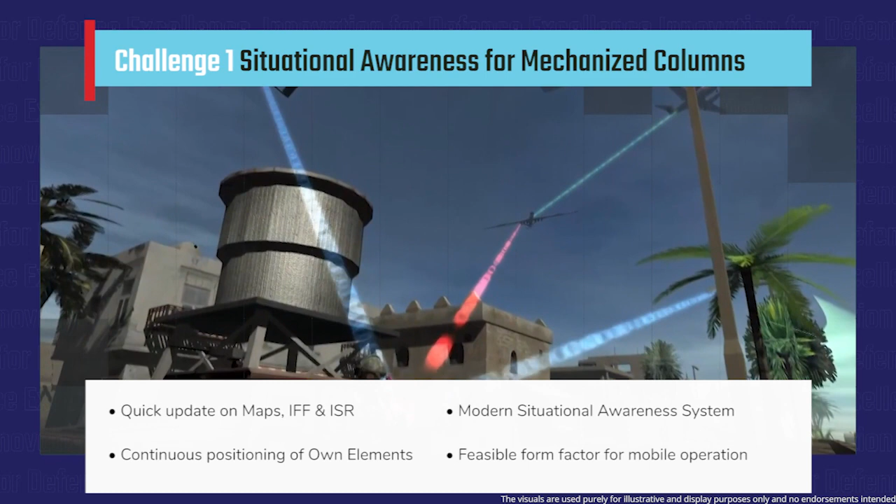Situational awareness for mechanized columns. Information in a battlefield environment is extremely complex and rapidly changing. With the rapid development of data collection, reconnaissance and surveillance devices, it has become very crucial to develop an intelligent and integrated platform to receive the information from various sources and visually present the analysis to commanders in real time for swift and better decision making in the battlefield.

AR/VR based sortie preparation aid. Aircraft and helicopter pilots often practice fly-throughs and sortie missions. During each of those practice flights, the pilots need to follow and familiarize themselves on various on-ground, during takeoff, in-flight and landing procedures. However, with the high cost of actual flying and very limited access to flight simulators, there is a need for cost-effective AR/VR based training solutions for the pilots. The solution should be easier for pilots to operate, portable and ruggedized for military specifications.

AI-based RF spectrum management. The wireless spectrum has been managed and utilized for military communication over many decades through a complex regulatory framework. The current methods of assessing and allocating spectrum are complicated due to the growing level of interdependencies as the number of services that require the band increases exponentially. An advanced and intelligent solution is required to seamlessly manage the spectrum allocation among the services within the military.

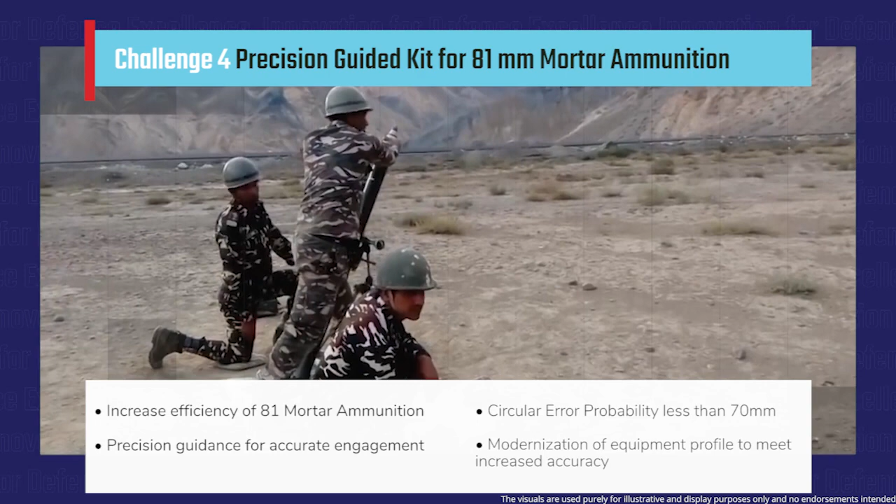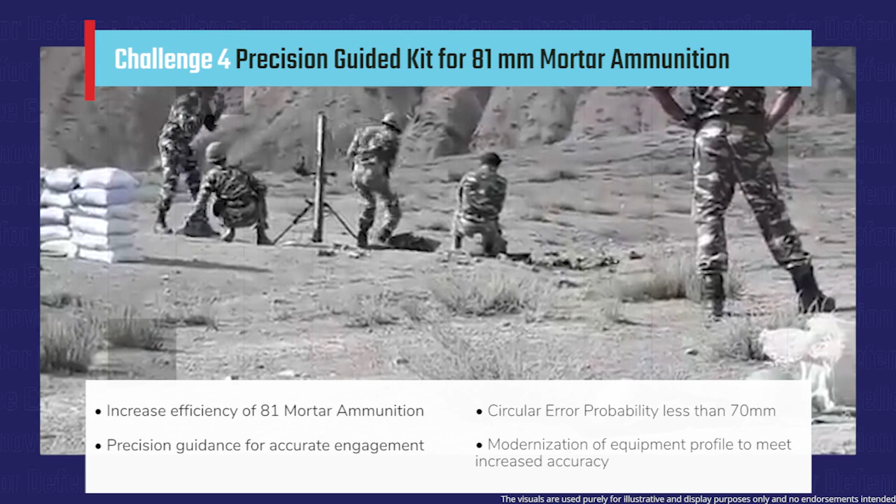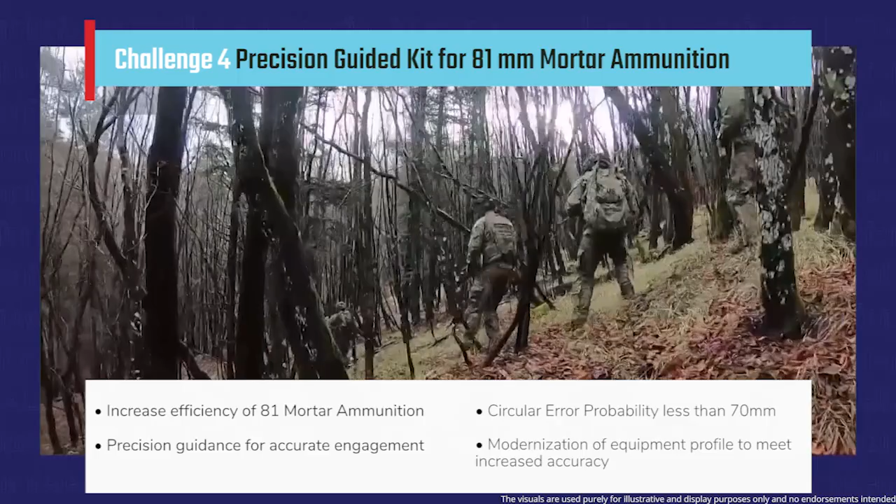Precision guided kit for 81 mm mortar ammunition. Infantry battalions use 81 mm mortar as battalion support weapon to provide close fire support to assaulting infantry. The ammunition of the 81 mm mortar has a tendency to disperse at the object or target end, and there is a very limited guidance or aiming equipment to support precision firing. There is a requirement to develop a solution with precision guidance for accurate engagement and reduced collateral damage.

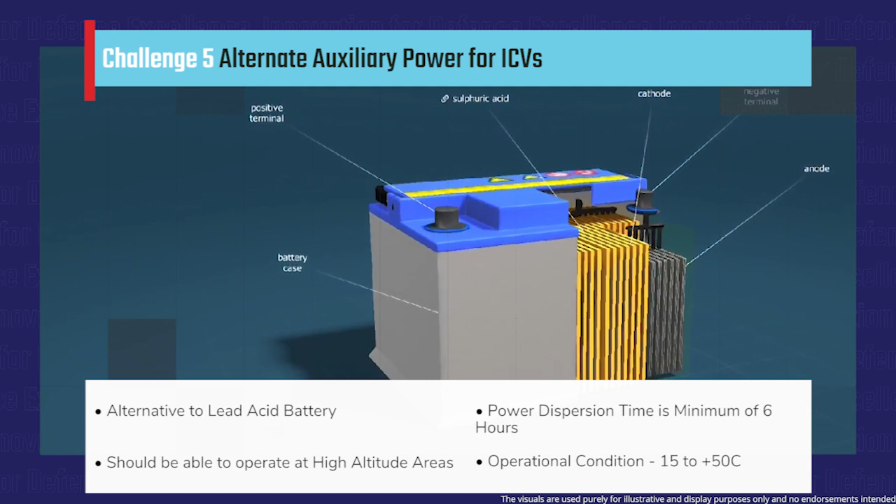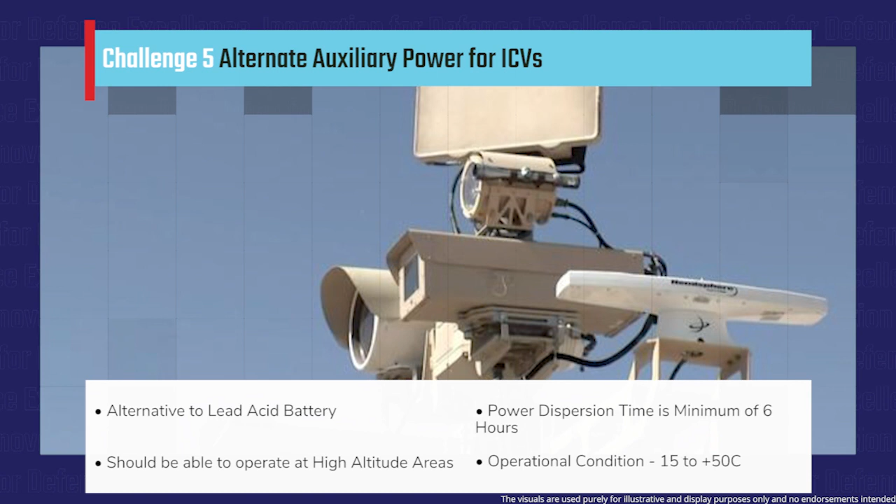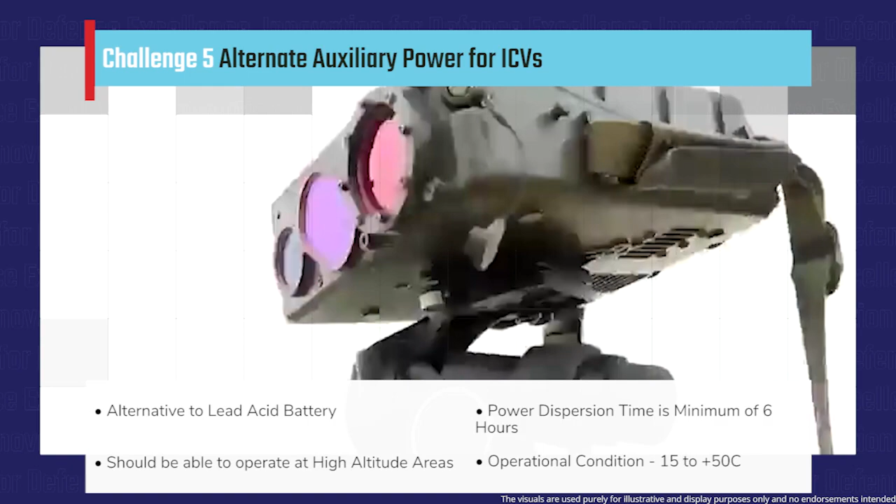Alternate auxiliary power for ICVs. During tactical situations, the infantry combat vehicles are powered off for stealth and utilize the lead-acid batteries to operate the sights, communication equipment, gun traverse and dome lights in order to carry out the silent watch of the battlefield without the main engine. The present lead-acid batteries lose power rapidly and degrade rapidly in extreme climate conditions. There is an immediate need for an alternate source-based auxiliary power enabling extended silent operation of the ICVs.

Part Task Trainer for Mirage 2000 upgrade aircraft. Part task training devices of aircrafts are used to offload some of the training tasks from the full mission simulators. Part task trainers are ideally used for instrument familiarization and other standard flight operations of an aircraft for training purposes. It is proposed to develop a part task trainer for Mirage 2000 upgrade aircraft with an accurate replica of controls in the cockpit.

Wideband HF modem for secure network. RF-based high-frequency communication has become an integral part of modern aircraft's communication systems. There is a need to develop an all-band high-bandwidth digital modem for bidirectional communication of voice, data and video. The modem should be compliant with the military-grade standards with a data rate in excess of 48 kilobits per second.

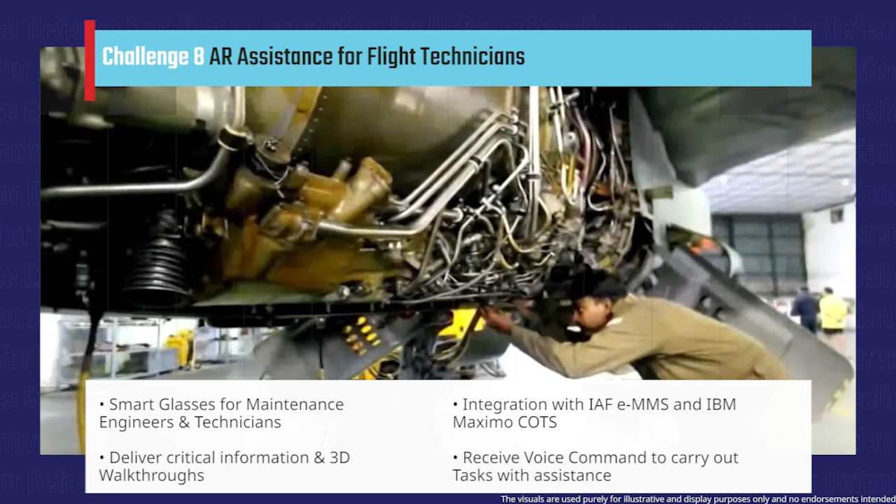AR assistance for flight technicians. Aircraft technicians and maintenance personnel refer to manuals and printed checklists during service and maintenance activities. In order to exponentially increase the quality and to reduce the downtime during maintenance, it is recommended that an AR solution is developed which guides the technicians through relevant diagrams and animations to correctly diagnose and perform the intended maintenance activity.

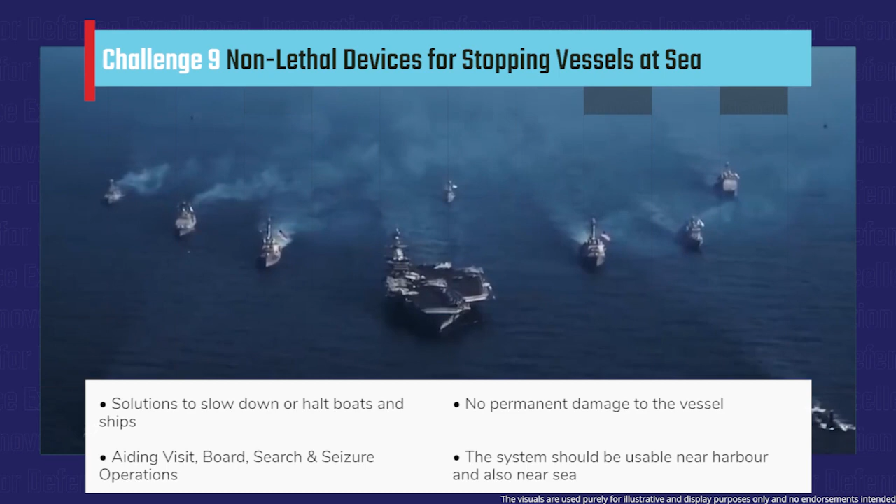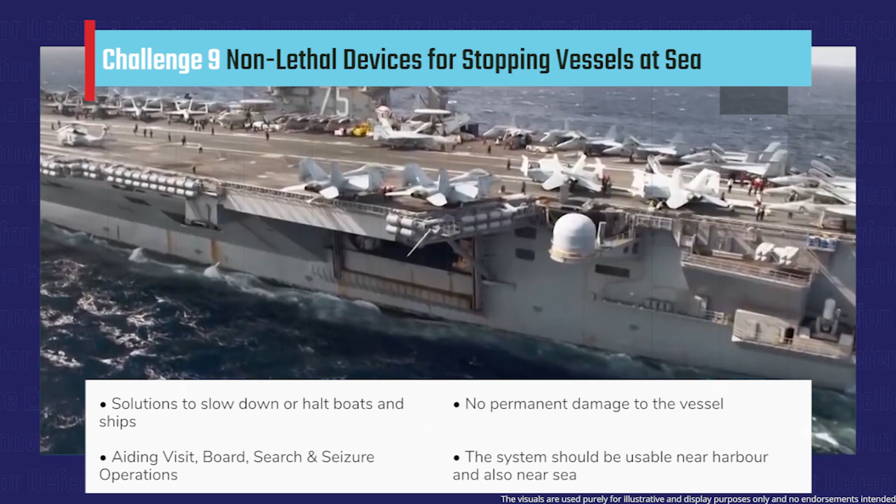Non-lethal devices for stopping vessels at sea. During peacetime, in order to perform visit, board, search and seizure operations on vessels, traditionally a rope with a drogue is launched against the propeller to stop the vessel. Such a system has many shortfalls and is highly inefficient to effectively stop the vessel. A solution is required to stop vessels in sea without causing any permanent damage.

Enhancing underwater domain awareness. With the advancements in the submarines, underwater drones and sensor technology, the Navy continuously monitors for threats underwater in the sea. There is a need to develop a comprehensive underwater domain awareness system which combines data from various maritime sensors and assets and presents in a meaningful manner for information consumption. The solution can also be equipped with advanced AI/ML capabilities to detect submarines and other underwater systems.

Sensor miniaturization for drones. Mini and micro drones have become an extremely efficient and cost-effective option for short and low-altitude surveillance. The conventional sensors, operational aids used on larger aircrafts need to be miniaturized for their use on the mini and micro drones. It is required to develop miniaturized versions of radars, sensors and navigation aids for implementation on drones and swarm systems.

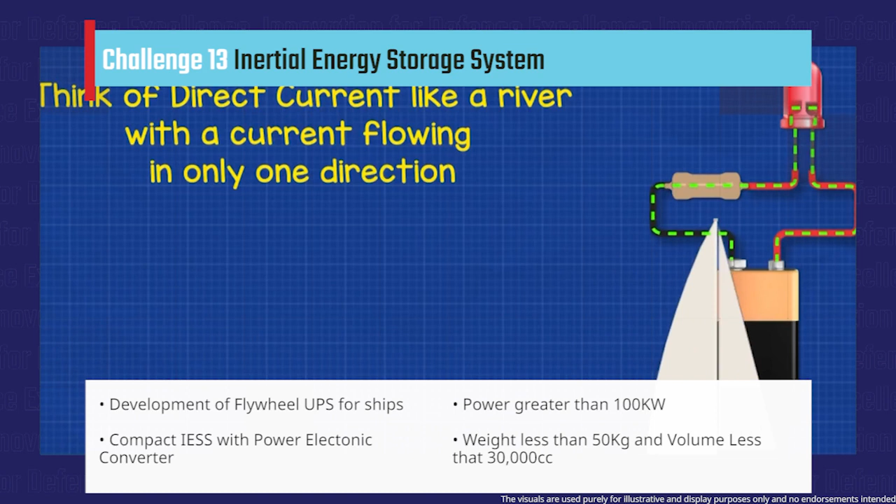Inertial energy storage system. The engines that propel ships in high sea are attached with heavy flywheels to store and regulate rotational energy. The energy stored in the flywheels can be converted into electrical energy for uninterrupted power. It is required to develop a system that harnesses energy from the high inertial flywheels and stores it in the form of electrical energy for uninterrupted power to critical parts of the ship.

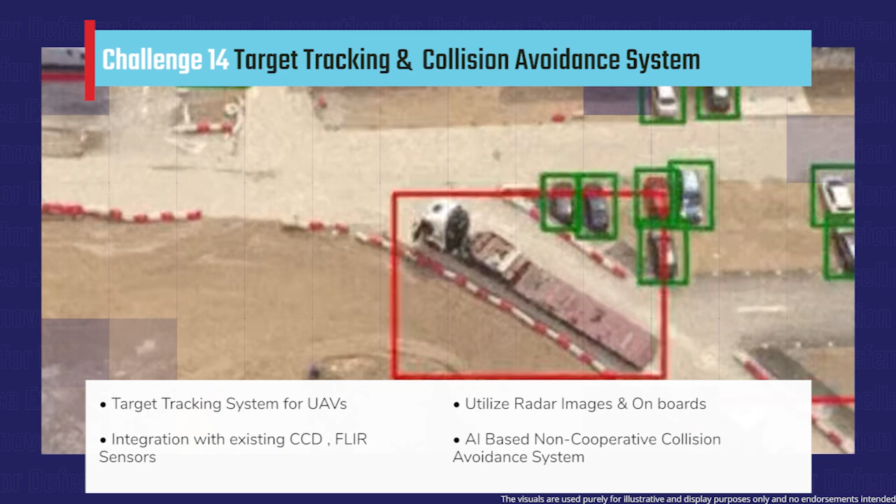Target tracking and collision avoidance system. Drones and unmanned aerial vehicles have become the go-to option for short and quick aerial surveillance and reconnaissance operations. Such UAVs are equipped with cameras and sensors to capture various ground movements in a battlefield or tactical environment. There is a need to develop an advanced AI/ML-based algorithm to identify and track ground targets. Also, an algorithm is required to avoid collision of UAV with objects such as trees, buildings, poles and vehicles.

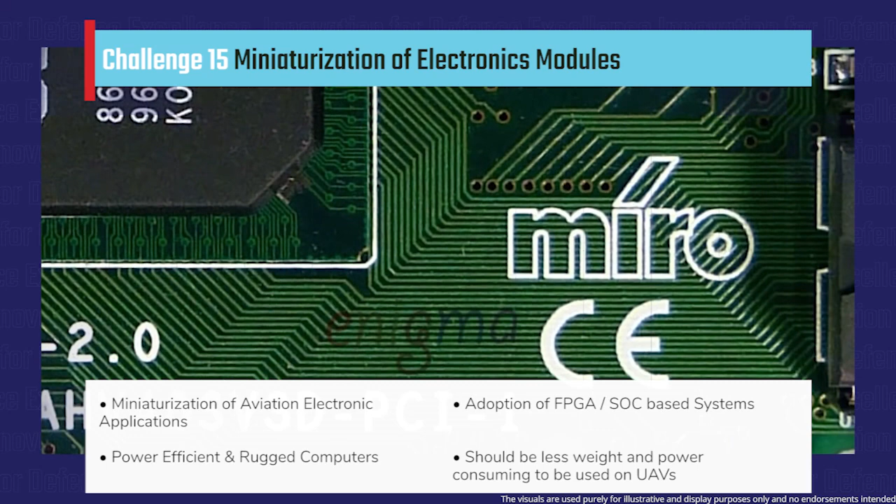Miniaturization of electronic modules. Reduction in size, weight and power of onboard electronics and equipment is of utmost importance in the aviation industry. The processing units and communication electronics used in military aircrafts are outdated and extremely heavy when compared to commercial electronics. It is required to reduce the weight and power consumption of core electronics in aircrafts by using multi-core processors and FPGAs.

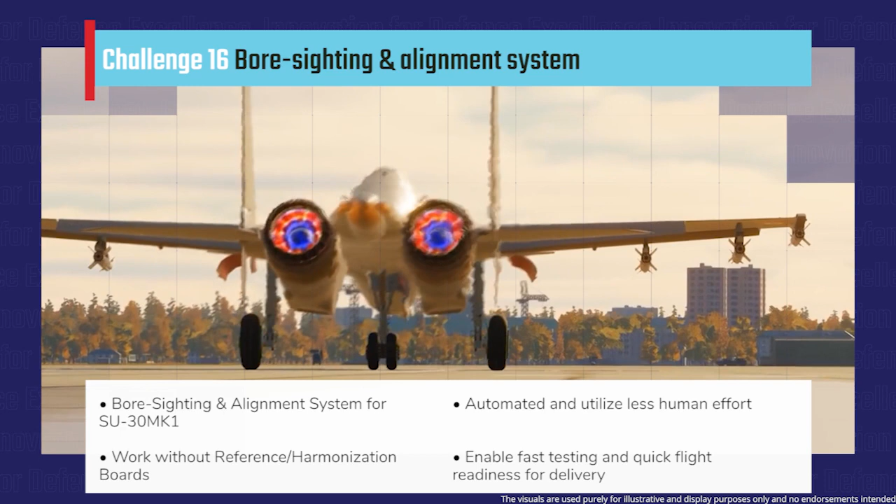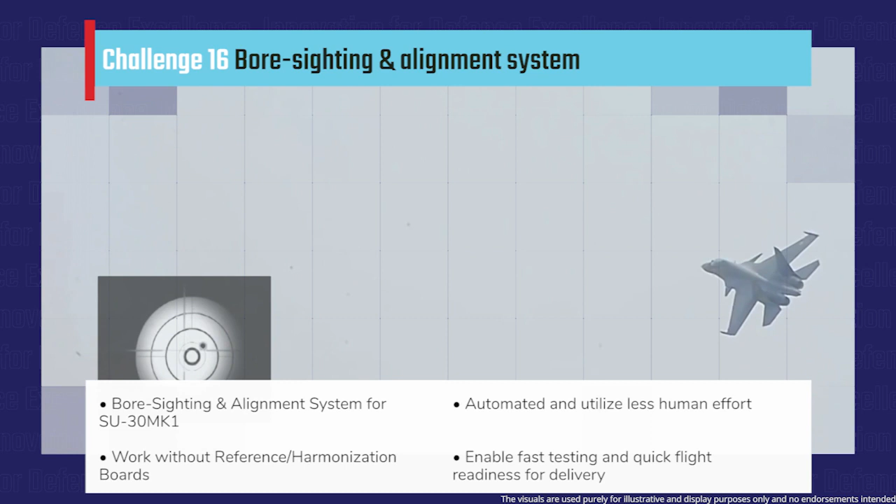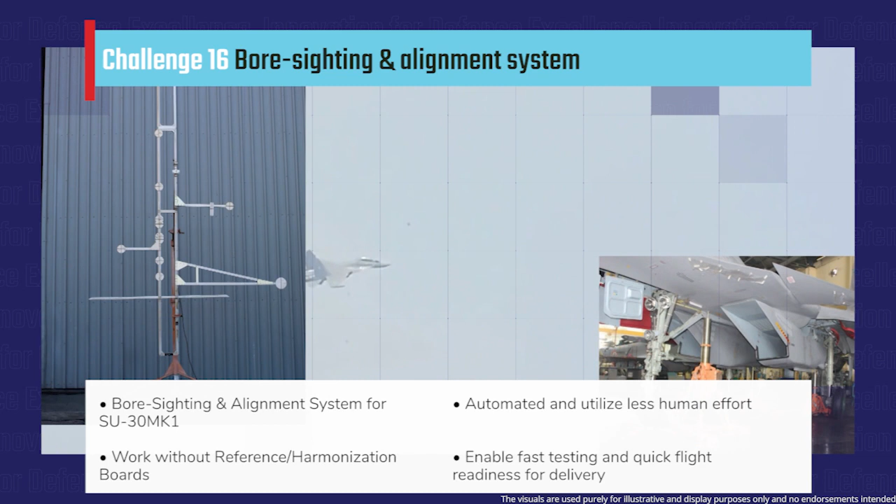Bore sighting and alignment system. The effective exploitation of the weapons, modern avionics and navigation systems during an air combat or navigation depends on accurate calibration and harmonization of all its functional parts. Traditionally, the deviations introduced during manufacturing or installation of various onboard systems are precisely measured and corrected using optical collimators, which demands large man-hours and is often prone to human errors. Therefore, it is proposed to design and develop a bore sighting system which can harmonize aircraft navigation systems, aiming sensors and weapons accurately.

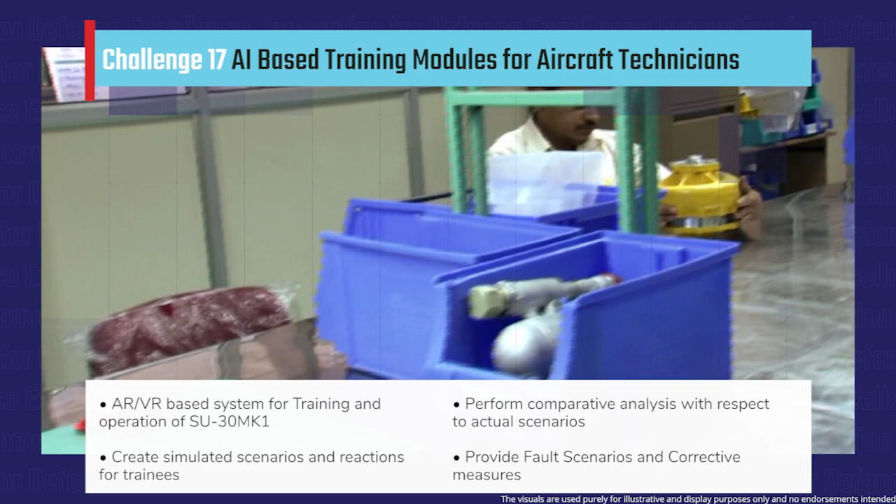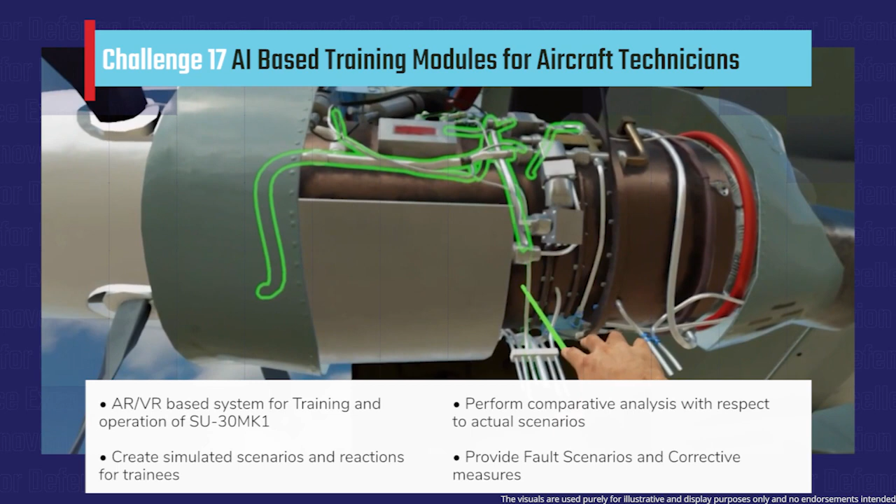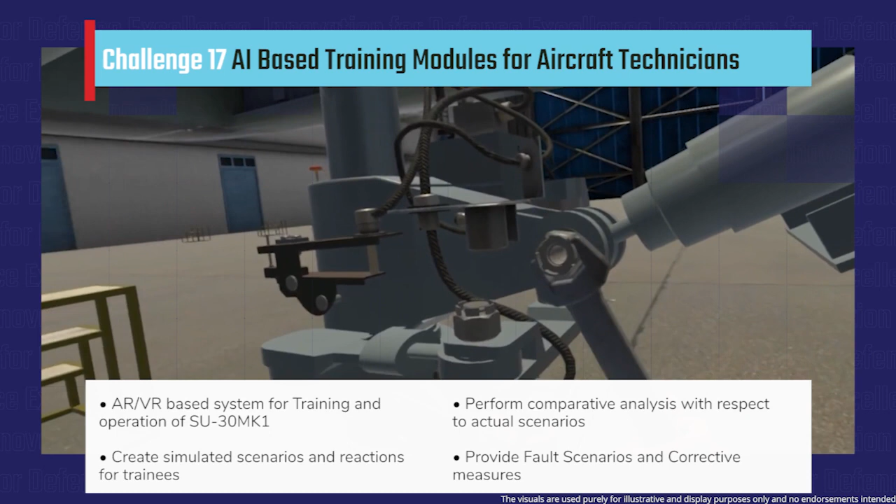AI-based training modules for aircraft technicians. Aircraft systems are very complex in nature, and the technicians require complete knowledge on all the systems in order to maintain safety and reliability of the aircraft. Also, the technicians are required to be periodically trained and kept updated about the snags that occurred on a particular aircraft and solutions applied. It is required to develop an AI/ML-based solution which learns about maintenance of a particular aircraft from the textual data and generate hypothetical scenarios for training the technicians on a specific aircraft. The solution should also evaluate the response provided by the technicians and provide feedback or recommendations.

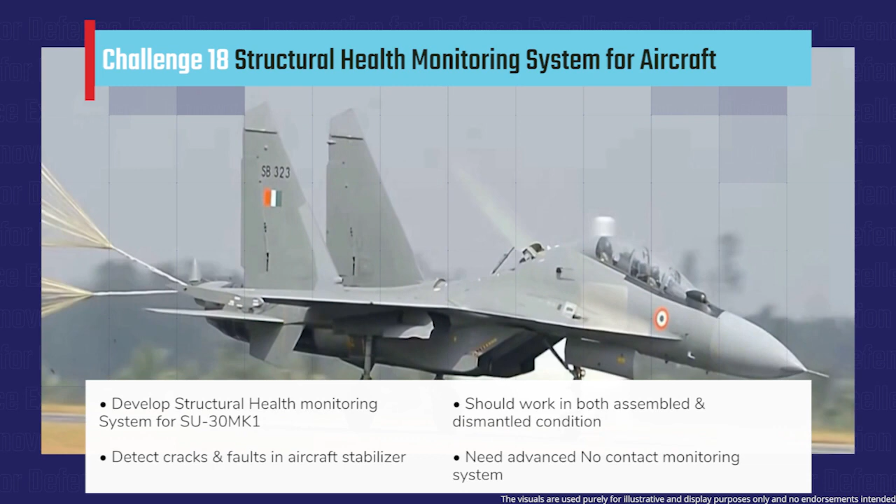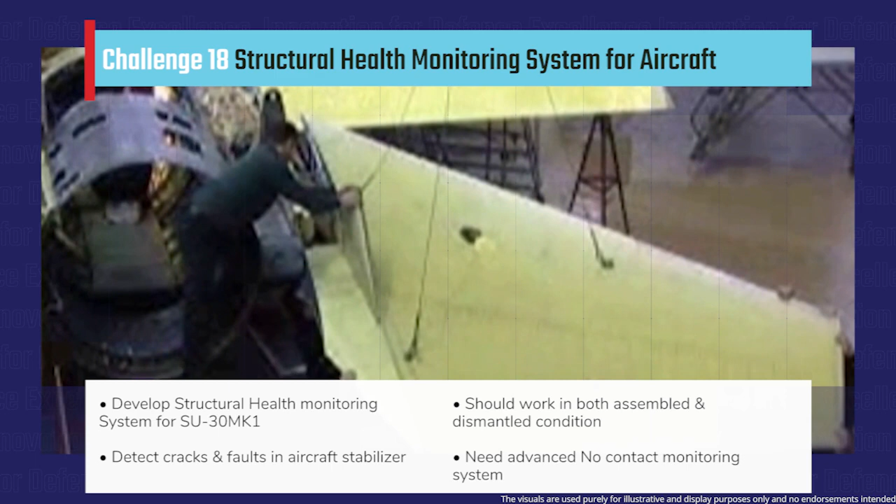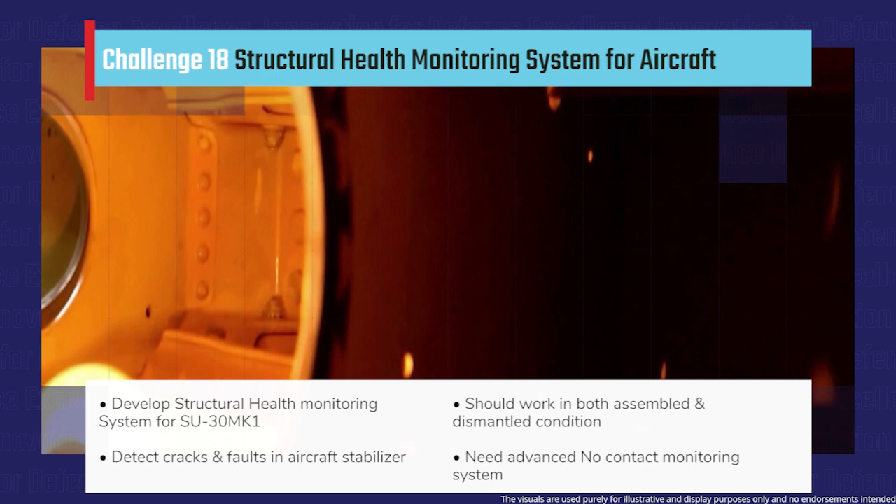Structural health monitoring system for aircraft. Fighter jets and aircrafts are subjected to enormous force and temperature in each of their flights, which develops structural defects and deformation on the aircraft surface. At times, it is very difficult to identify the defects using the existing methodology in inaccessible areas. In some of the cases, dismantling or removal of structural members are required for thorough analysis, leading to increase in aircraft downtime. An advanced and effective AI-based non-contact technique is envisaged to identify cracks without dismantling of aircraft structure.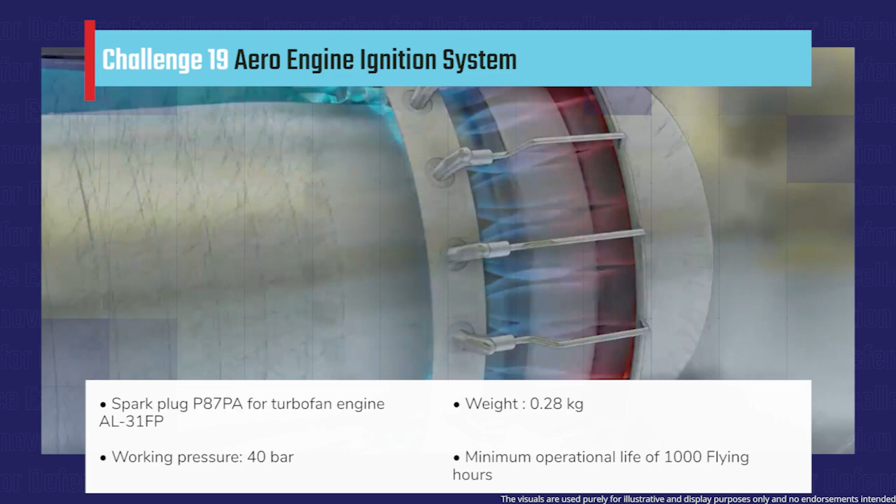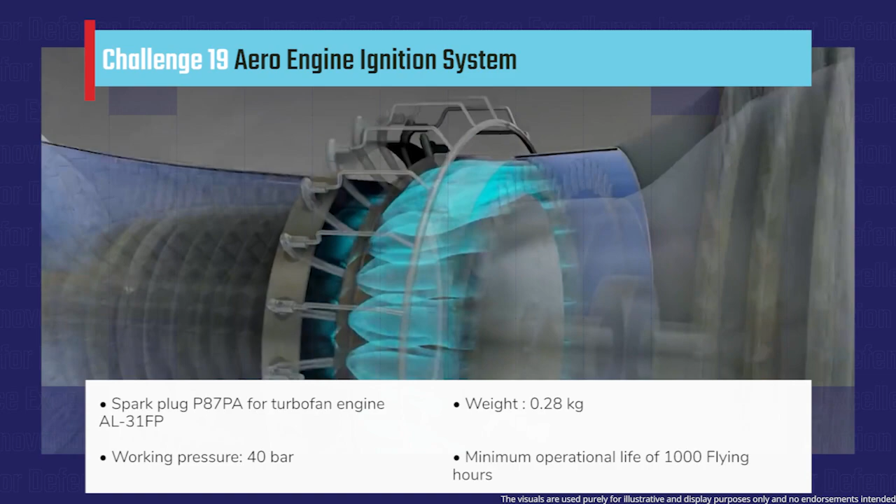Aero engine ignition system. The turbofan engines are one of the most complex combustion engines used to power the modern fighter aircrafts. The ignition system, particularly the spark plug, is operated in a very hostile environment inside the engine with high temperatures and pressure. There is a need to develop a reliable spark ignition system for the fighter aircrafts.

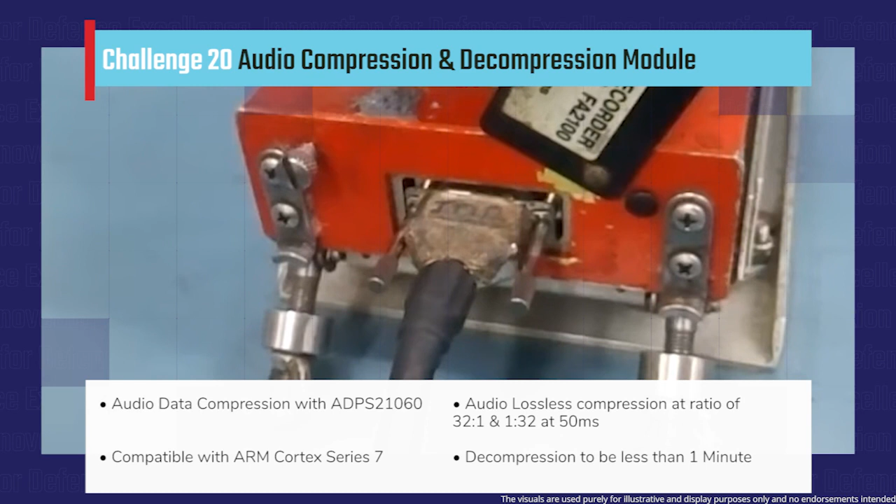Audio compression and decompression module. In order to efficiently transmit the multimedia data over a limited bandwidth network, various compression techniques are employed to effectively reduce the size of the data for transmission. With the ever-advancing signal processing and compression techniques, it is required to develop a modular software for compression and decompression of audio in compliance with ADSP 21060 standards.

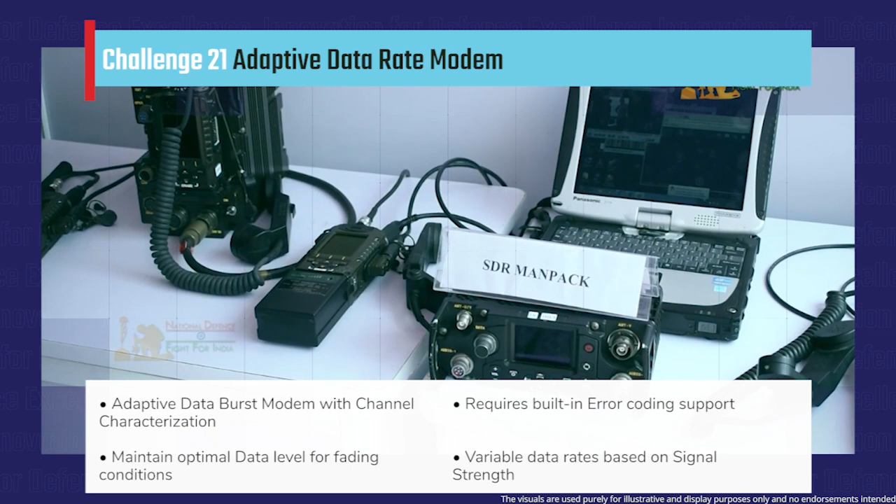Adaptive data rate modem. Communication with aircrafts is carried out over a proprietary ultra-high frequency wireless network with the aircrafts acting as nodes. As the number of nodes increases, the networking infrastructure needs to accommodate them reliably without any issues. Also, the different data channels have different data rates for efficient transmission. The need of the hour is an adaptive data rate modem for proprietary mobile ad hoc networks.

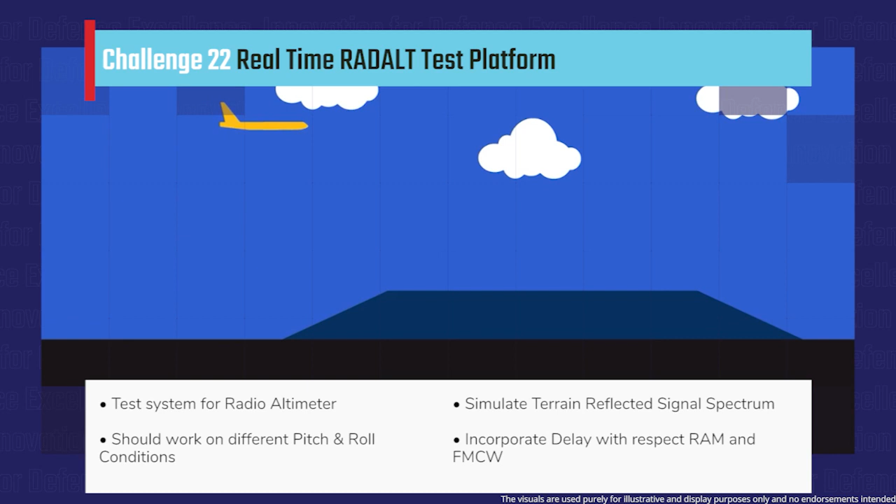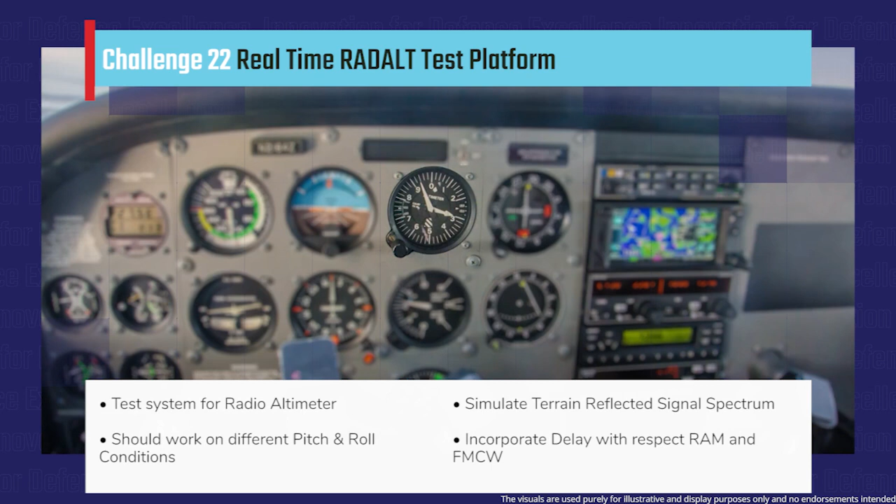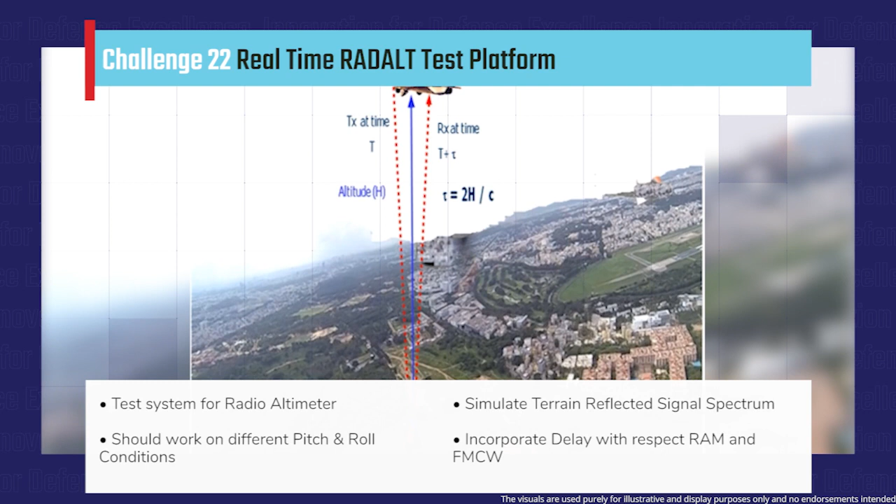Real-time RADALT test platform. In modern aircrafts, radio altimeter is used to provide an accurate indication of the altitude of aircraft above the terrain. Radio altimeters are constantly undergoing design and development in order to improve their accuracy and power efficiency. Also, these radio altimeters are periodically calibrated for operational effectiveness. There is a need to develop a real-time test platform to simulate the operational environment and test the radio altimeters.

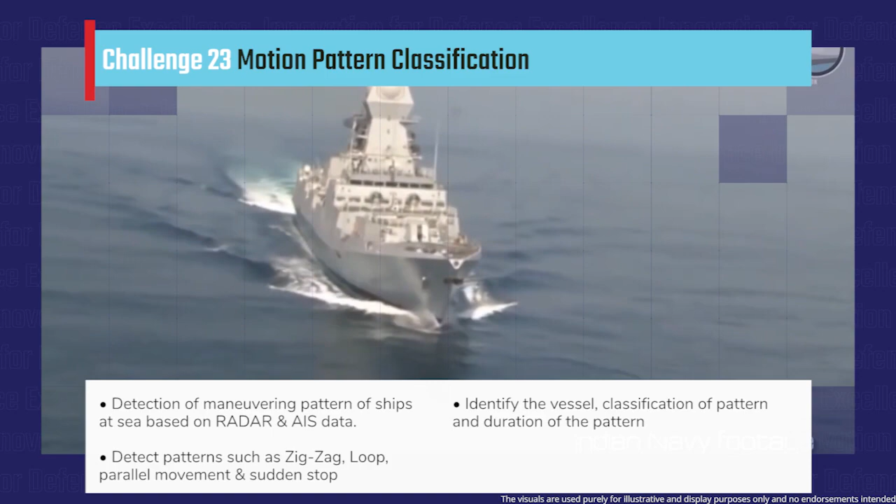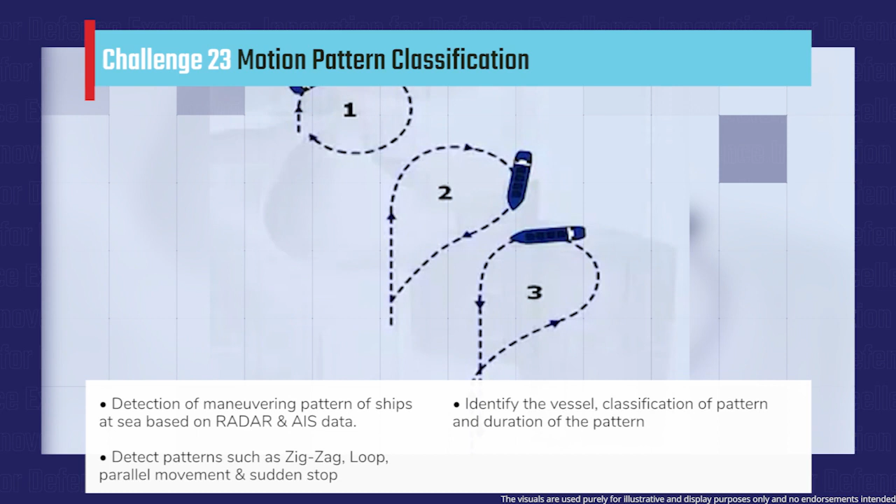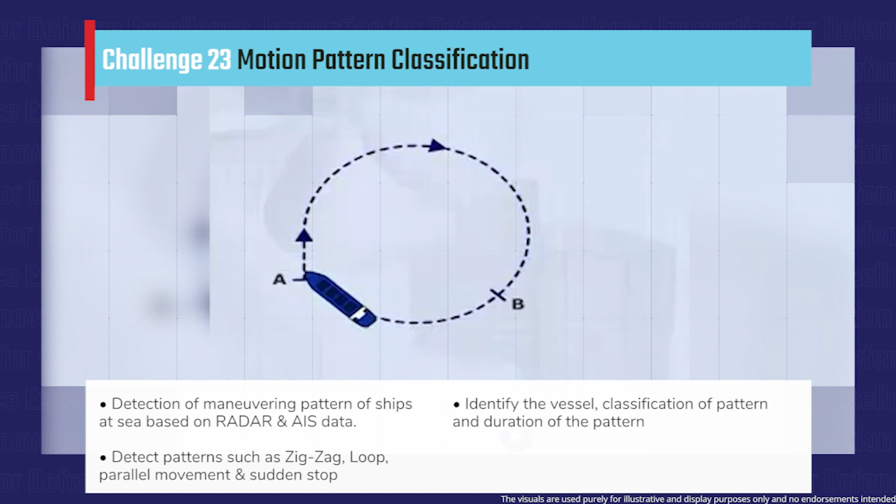Motion pattern classification. Understanding and recognizing the ship mobility pattern have a great significance for intelligent maritime applications. An advanced solution is required for the detection of various maneuvers in the ship mobility pattern based on the ship location, course and speed of active vessels in real time. The solution should be capable of identifying type of the vessel, movement pattern and duration of the pattern followed in the ship mobility path.

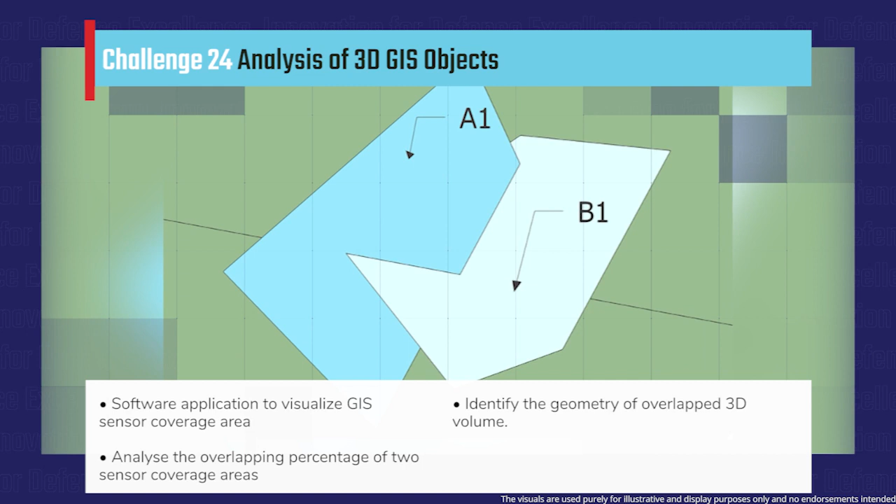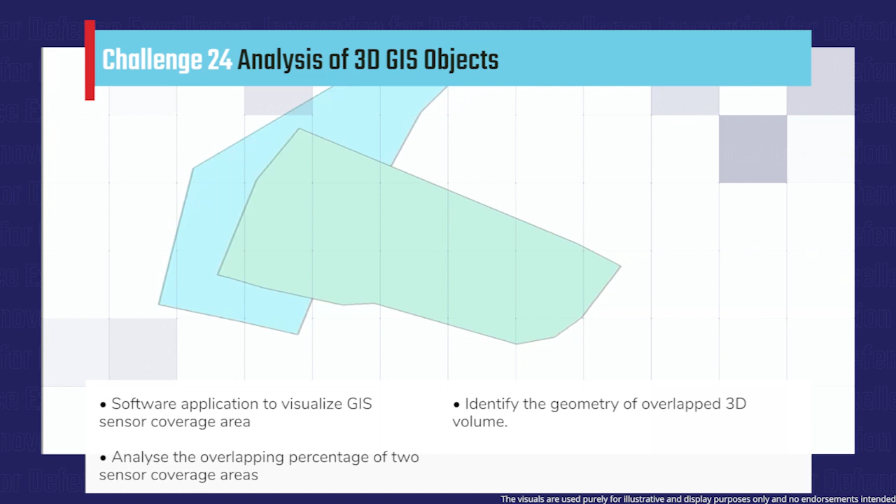Analysis of 3D GIS objects. Data for Geographic Information System (GIS) is usually obtained from various sensor sources and fused together in the form of meaningful data. The sensors are carefully placed in order to effectively capture the complete data. The geometry of the area covered by a sensor can be of regular or irregular shape. It is required to develop a software solution to provide visualization of sensor coverage area and overlapping percentage of area covered by multiple sensors.

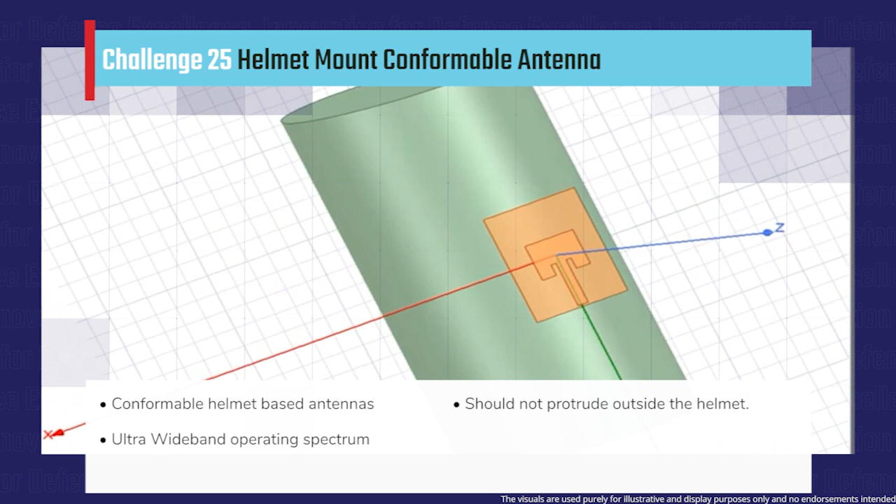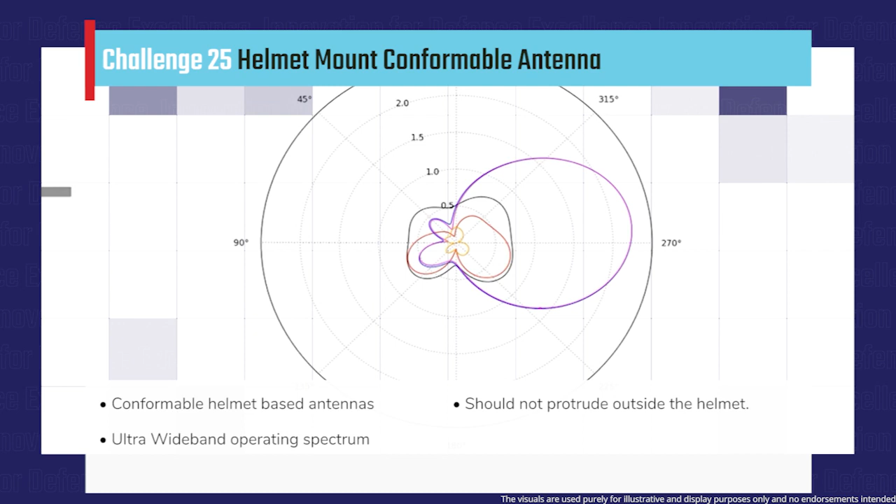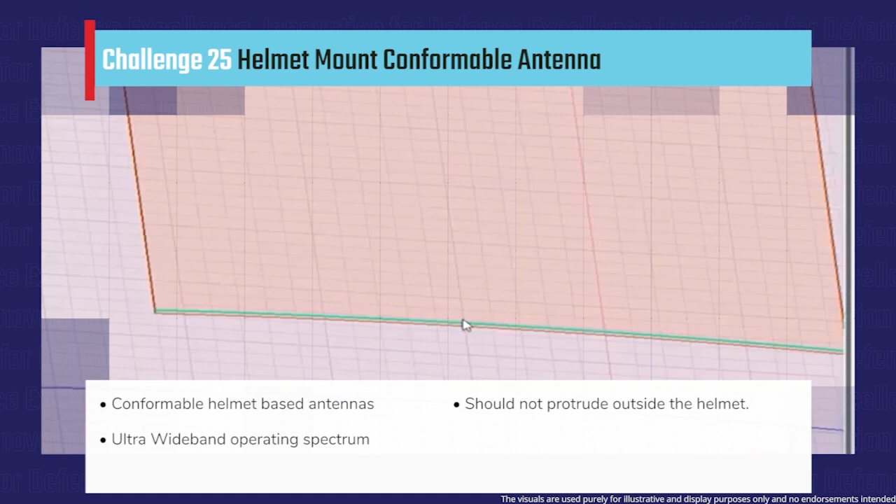Helmet mount conformable antenna. Modern personalized communication systems are constantly evolving with the advent of wearable and embedded devices. Traditional antennas on helmets protrude outward, which is hazardous to personnel and often gets damaged because of its protruded form. Alternately, helmet mount conformal antennas are envisaged for wideband operations, which do not require tuning to operating frequencies and provide high gain, desirable for many communication applications. These antennas can be positioned inside, outside or within the helmet without compromising the structural integrity of helmets.

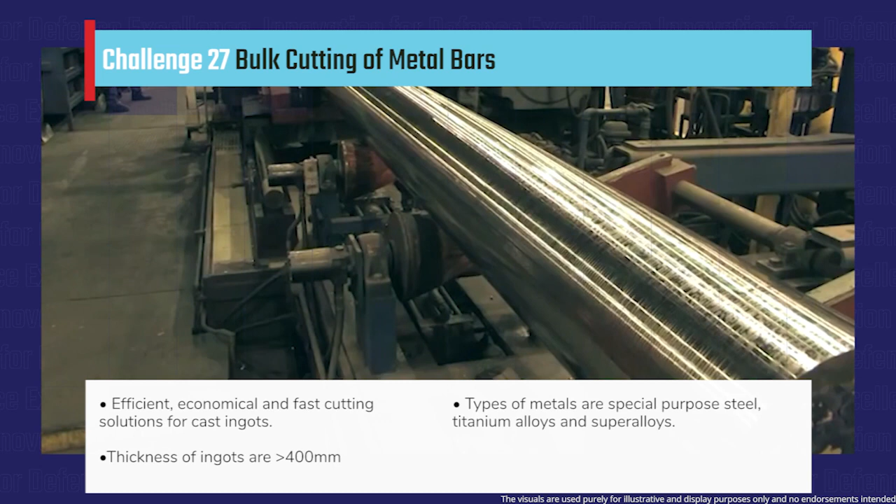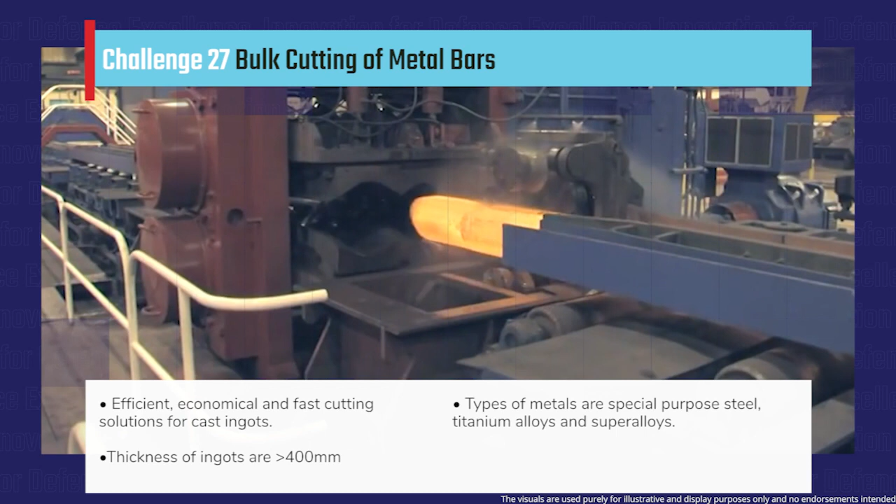Bulk cutting of metal bars. Titanium alloys, special steel and superalloys are widely used in defense and various strategic sectors. These metal alloys are cast into large size ingots or semi-finished forms such as metal bars or cylinders with over 400mm thickness. These are cut in different sizes using electric discharge saws and band saws, which is a slow and tedious process. It is required to develop efficient, economical and fast cutting solutions for high strength metal bars.

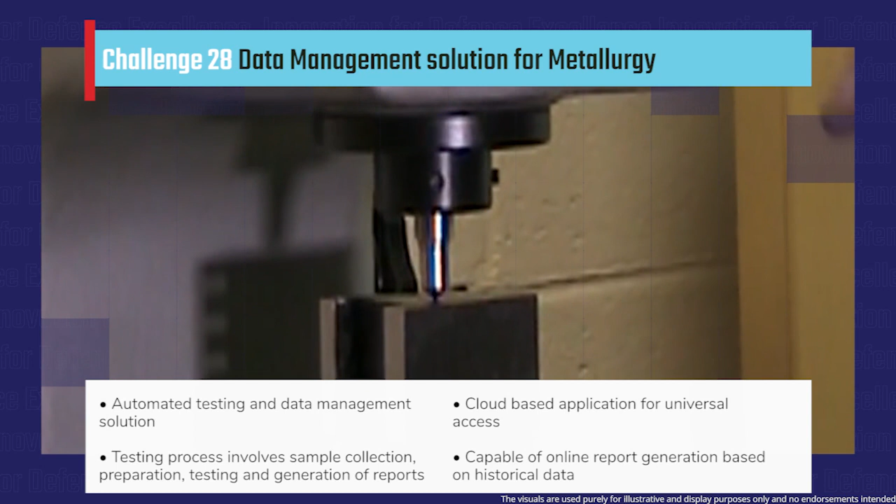Data management solution for metallurgy. Special steel and metal alloys developed for defense and aerospace industries are subject to a variety of testing and certification procedures. The data of those tests are stored for a significantly longer period to track in case of any issues identified later. Currently, the testing and data storage process is manual, from sample collection till test report generation. It is imperative to develop automated tests, efficient data storage and report generation solutions to digitize and optimize the complete testing cycle.

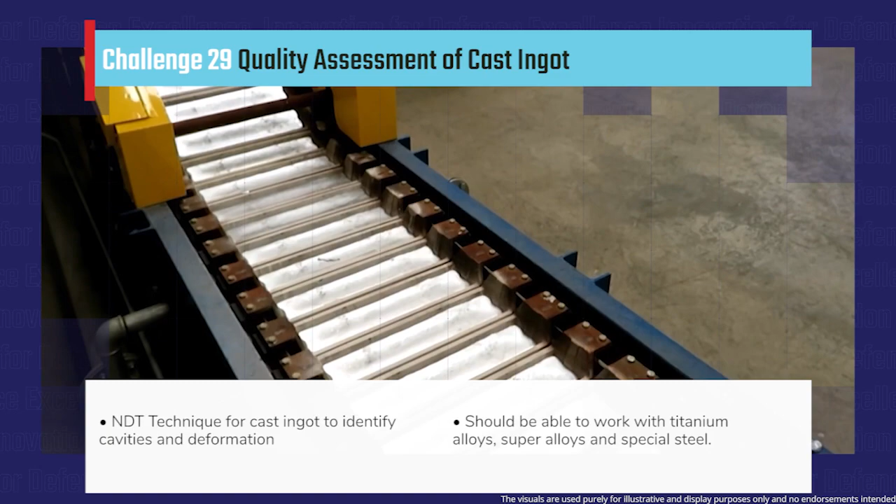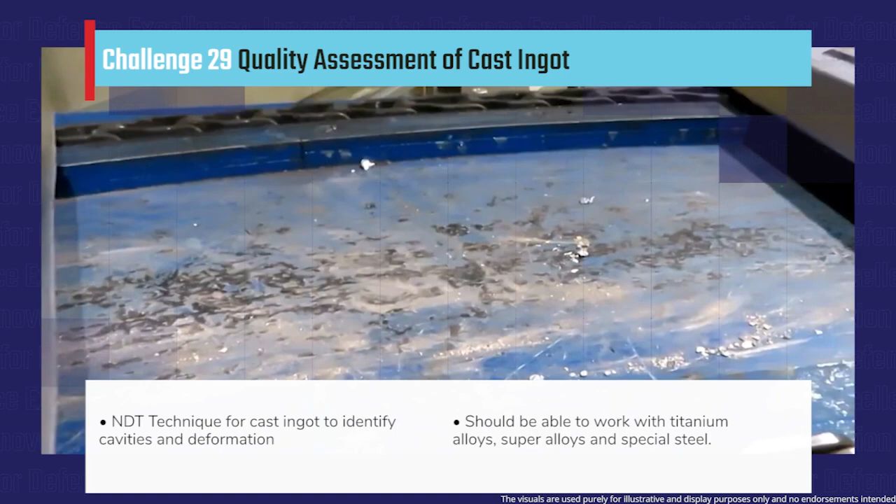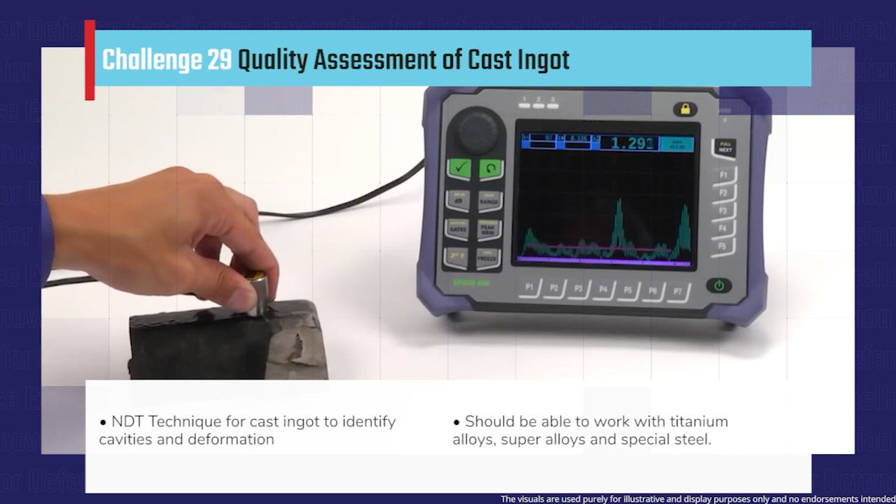Quality assessment of cast ingot. Non-destructive testing (NDT) consists of a variety of non-invasive inspection techniques used to evaluate material properties, components, or entire process units. The techniques can also be utilized to detect, characterize, or measure the presence of damages in metals. But currently, there are limited or no solutions available for quality assessment of large cast ingots for identification of defects such as voids, inclusions, internal cracks, etc. A solution is required to identify defects on cast ingots during production to improve quality and reduce rejections.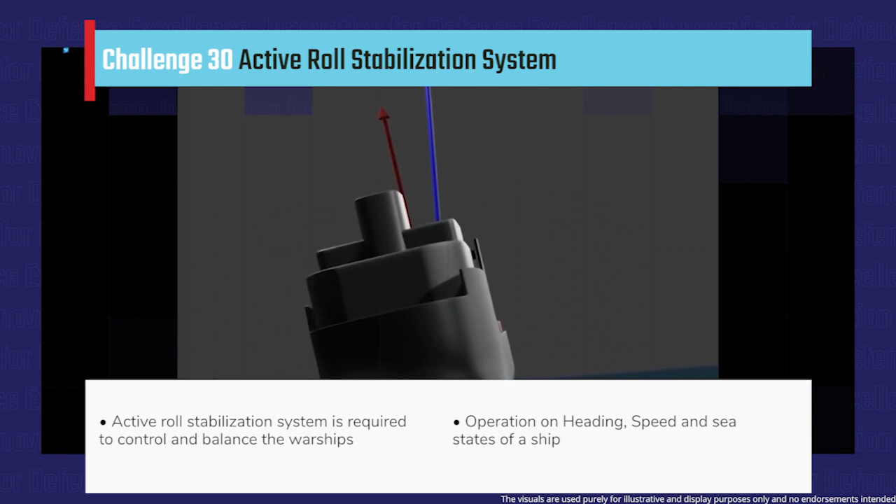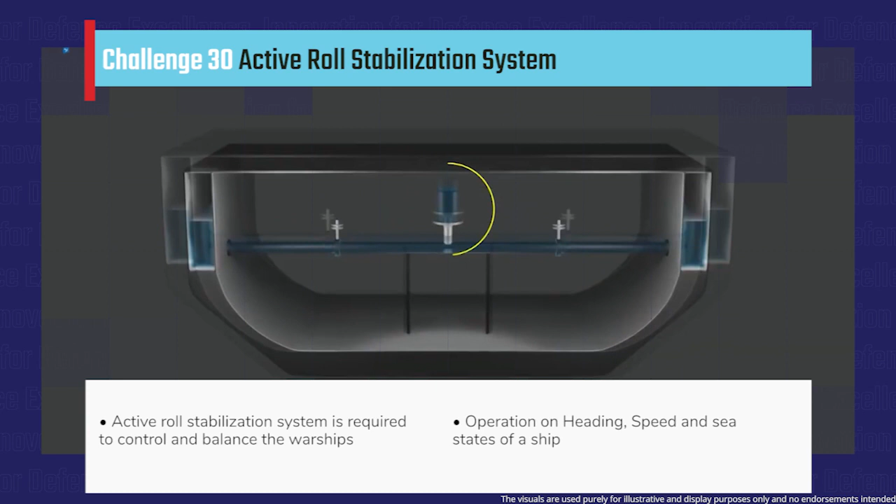Active roll stabilization system. Traditionally, warships are fitted with fin-type structures to stabilize roll on the ship using hydrodynamic effect. This method is not very effective, especially when ships are moving at lower speeds. Also, the fins create significant unwanted drag, which increases fuel consumption. An active roll stabilization system is required to control and balance the warships, working across the operational speed of the ship and also in difficult environmental conditions.

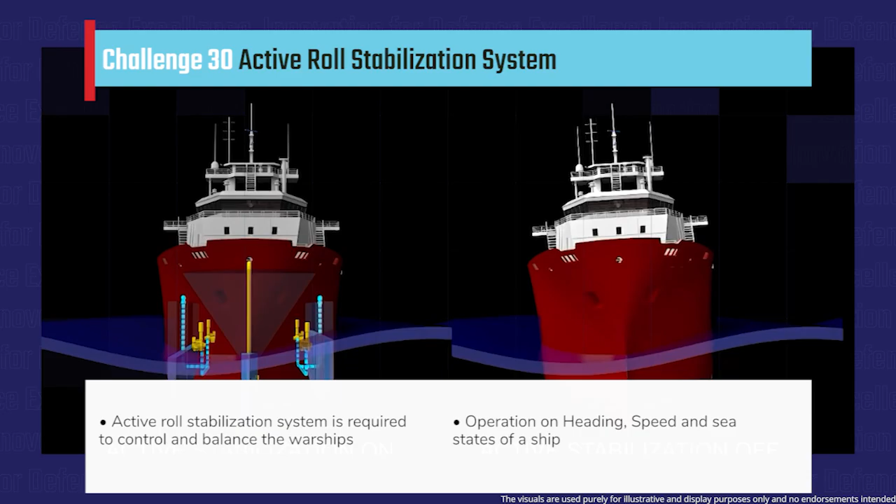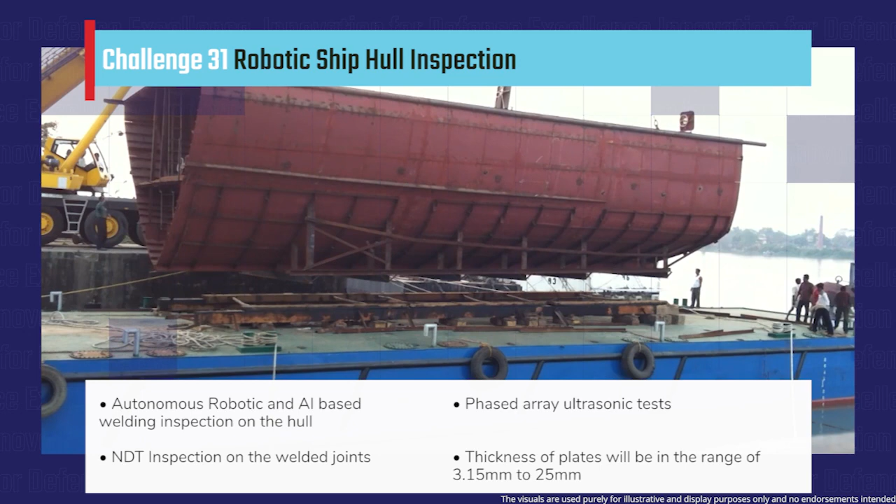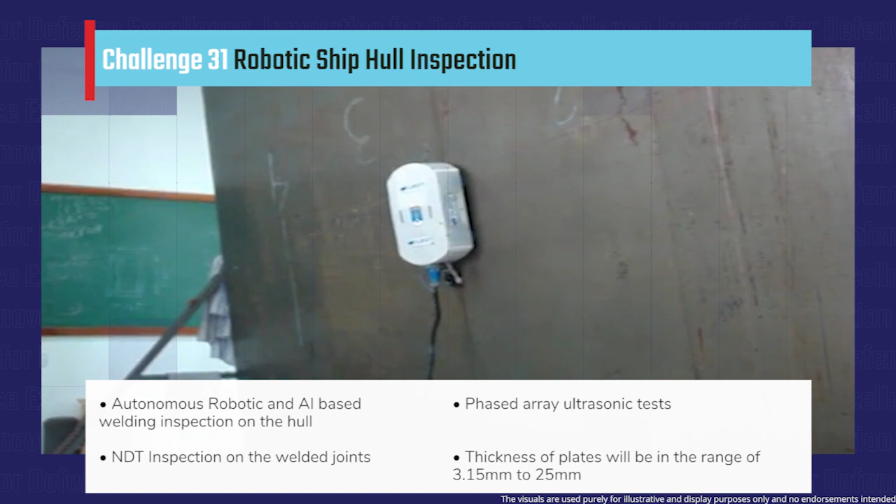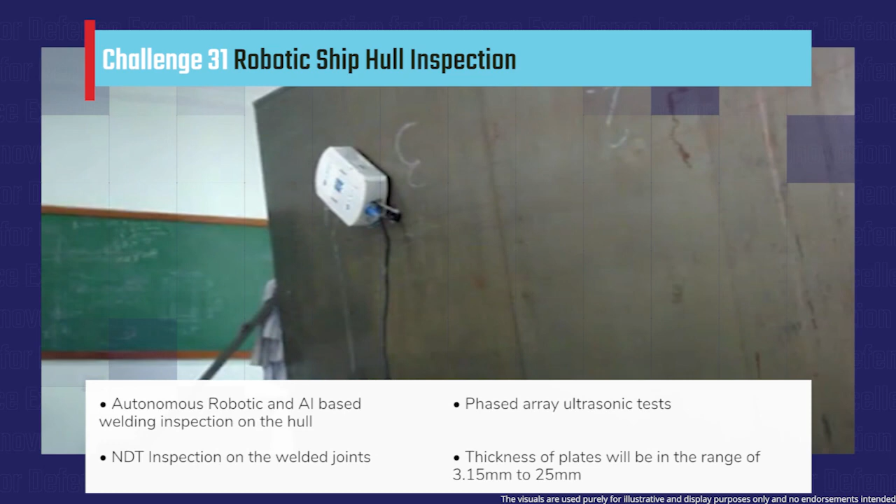Robotic ship hull inspection. The hull of the ship is constructed by welding several parts of metal sheets together. Welding is considered one of the most critical and large operations in shipbuilding. To ensure the quality of the welds, non-destructive tests are carried out extensively to identify the presence of any defects. This is largely a manual process, which is extremely error-prone and time-consuming. It is required to develop an advanced robotics and AI-based solution to reduce human dependency on hull testing.

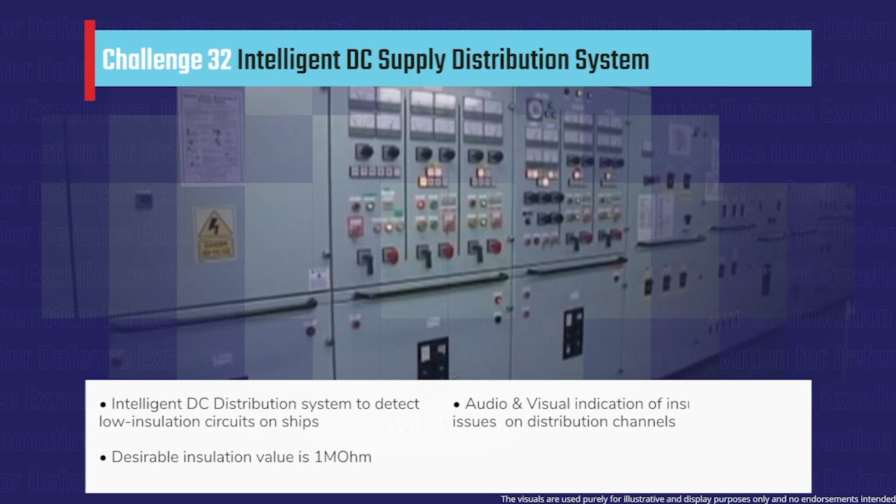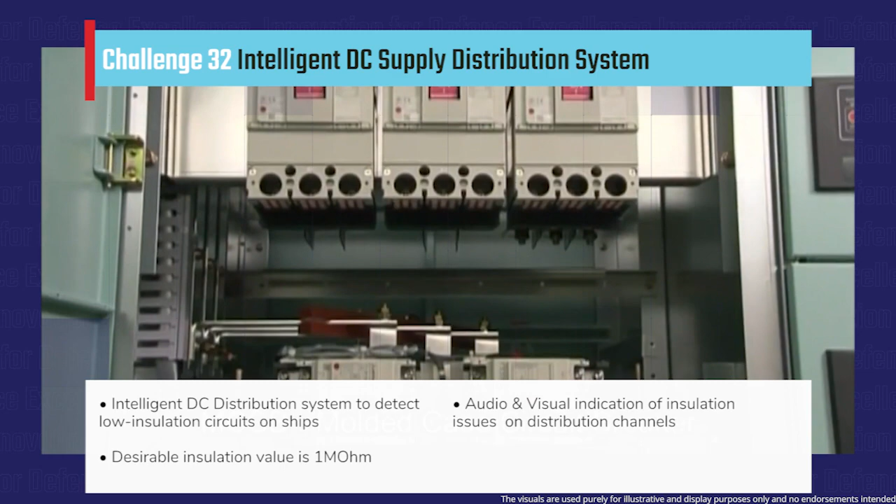Intelligent DC supply distribution system. Ships have multiple machineries and equipment which operate on different input power ratings. So far, power distribution inside a ship is managed through conventional AC and DC power distribution boards. Particularly in DC distribution boards, low insulation from load and many parallel connections leads to damage of the distribution boards as well as the load. It is desired to develop an advanced DC power distribution system capable of providing visual and audio alerts for issues encountered.

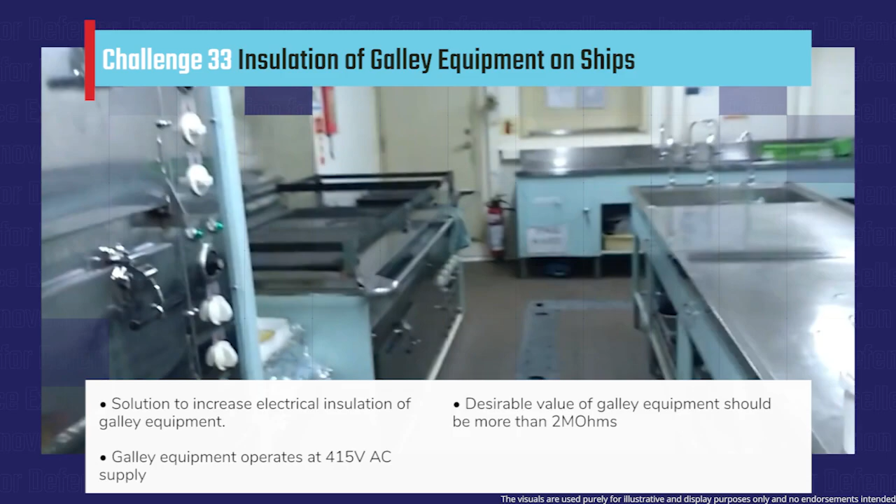Insulation of galley equipment on ships. All the equipment used inside ships is heavily insulated to prevent electric leakages. Even a slight power leakage can become a huge problem since the entire ship is made using metal. While most of the critical equipment is well insulated to prevent power leakages, there are a few galley equipment which have low insulation. It is required to provide a generic solution to increase the insulation on galley equipment in order to reduce the risk of electric leakages and shock.

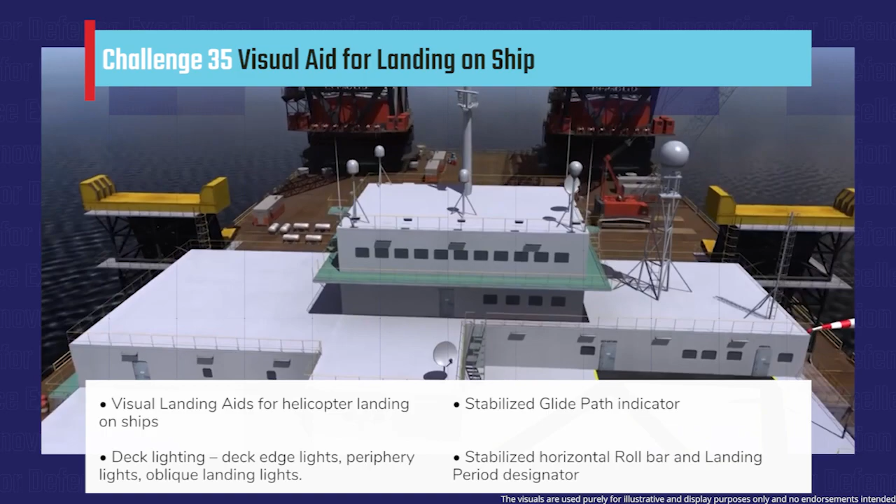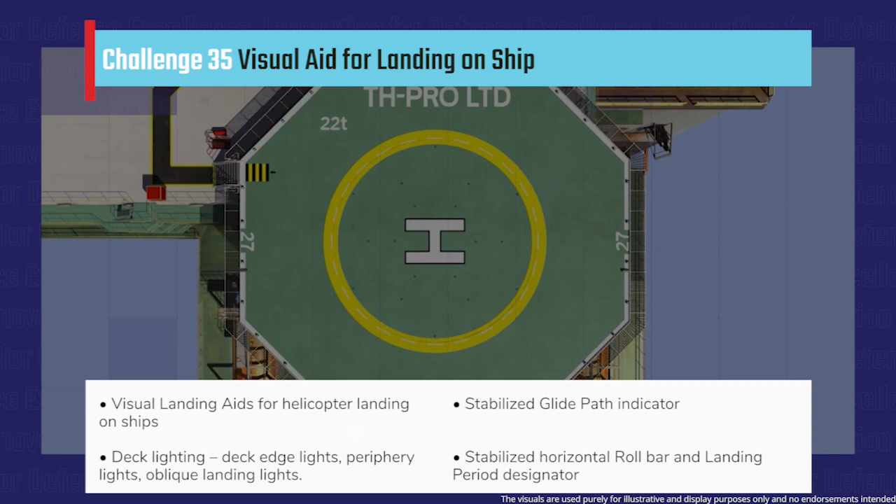Visual aid for landing on ship. Naval ships that operate helicopters need visual landing aids that enable pilots for safe operation of the helicopters. In addition, for operation at night, standard and night vision goggle compatible lighting and landing aids are used to ensure secrecy of flight operations without compromising safety. It is required to develop a modern and advanced system to guide pilots for landing on ship in both day and night conditions.